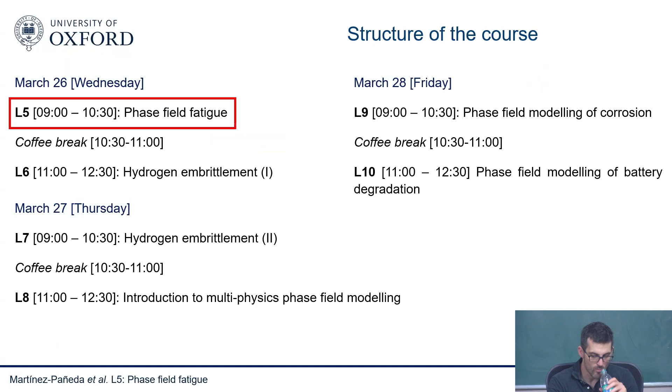A reminder of what we discussed in the very first lecture on Monday: there are basically various regimes in fatigue. The first regime is very microstructural-dominated, where most of the time you spend nucleating a crack—this is the most challenging regime in terms of understanding and prediction. Then there's a regime where you already have a macroscopic crack, and that crack is growing.

It's growing following Paris law. Then you find the final regime where your crack is close enough to the final crack size driven by static fracture, so it grows very fast.

So how do we characterize things in regime B? This is the Paris law—this is what everyone uses. It's still a bit empirical: you have a C and an M parameter that you need to fit to experiments. It would be great to reduce that empiricism, to actually figure out what this C and this M mean from more first principles, more mechanics.

The other regime is regime A, this first stage, where you're nucleating a crack. This is very microstructurally dominated, and normally we evaluate it with S-N curves. We run experiments alternating a uniaxial tension test with cyclic loading until we measure failure of the sample. We get a lot of scattering, but we get these kinds of curves that are used in fatigue design.

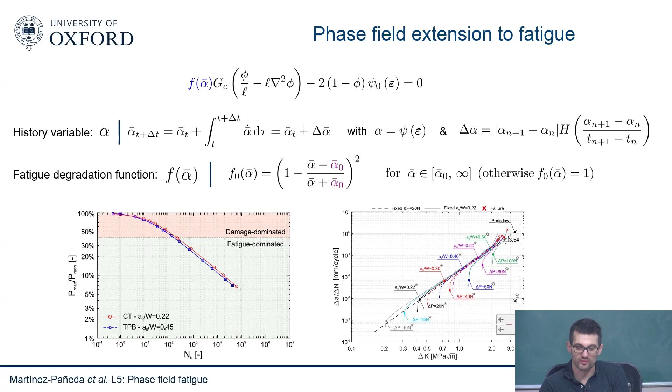So the bad thing about it is we have to make some choices. These choices are qualitatively in the right direction, but we depend on some values that we need to fit to an experiment. But the good thing is, these are results from their paper—when you run these calculations, you predict as an output of the model, not as an input. Before this, there was some work done with cohesive zone elements, but other than that, all the models we had for fatigue would normally require you to do the test, feed the data from that test, and then the model will only reproduce the test, basically. You will not be able to reproduce tests without any experiment.

But here you can see that, without any experiment, you capture both SN curves—this is load versus number of cycles to failure—and Paris law type of behavior. And again, the Paris law comes out of the model. Remember, Paris law has this C and this M—I don't put any C and M in this model, I just run my simulation, the same model that I use for an SN curve. You can see here, this is for a load of 10 newtons. It goes like this, and eventually you fail. So it's not only Paris law, it's the entire regime—you can see that we capture the entire regime with this model.

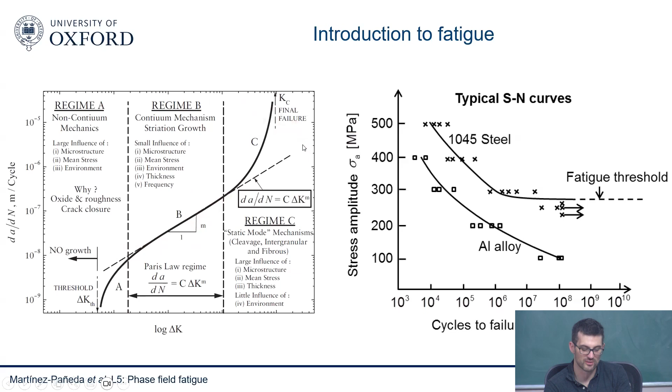So it looks promising. There are some things to polish, but it's quite promising, because a lot of people use Paris law, and you need to do an experiment, but that's okay, we can run an experiment. But Paris law is only appropriate for a certain regime, so there's a danger you're applying Paris law where it wouldn't make sense. This model not only reproduces Paris law, but is also able to capture the whole experiment from the delta K threshold all the way to complete failure. You can see it in all these cases for different load ratios. So it's quite promising—you can get SN curves and Paris law out of the model. It's not an input to the model, it's an output of the model. This is the main difference with other existing models.

We started working on this, and this was work done by my student Alireza Golahmar, who I co-supervised with Christian Niordson in Denmark. Aligesa was funded as an industrial PhD student, funded by a company, Vattenfall, who were looking to extend the lifetime of offshore wind turbines. They operate and manage the oldest offshore wind farm in the world, called Horns Rev 1, in Denmark. These offshore wind farms—I'll talk more about that when we discuss multi-physics problems—are supposed to last only 25 years, and the oldest one in the world, Horns Rev 1, is 24 years old now. So they very soon need to decide whether to extend it or not. Because fatigue is so empirical, that 25-year decision was something a bit crude, so they hoped to improve it with mechanistic predictions, and funded this PhD studentship. He had a very practical mindset and said, I'm interested in publishing papers, but I'm also interested in coming up with something useful.

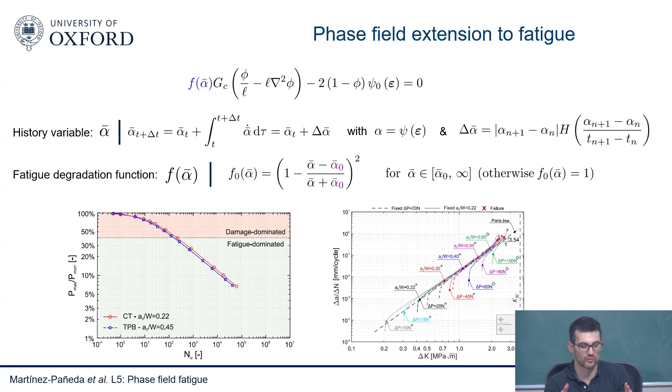So then he realized there were multiple challenges. The first is that this was all very qualitative, but when you try to fit experiments, this model wasn't good enough for him. He needed more flexibility, so he changed his approach. Basically, he changed the way we accumulate this alpha increment, and he came up with this equation. He said, this is what I need to capture experiments. So the idea is you have various ingredients that I'll discuss, but basically you accumulate your cycling variable as a function of these variables.

This is the Heaviside function. There's a term that accounts for the load ratio, an exponent n, and then this alpha 0. So this is the load ratio that you apply, meaning we have an extra parameter. That's the price to pay, you add an extra parameter. But he felt he needed to add that extra parameter, otherwise he wouldn't be able to capture experiments.

So that's an output of the model. We run your numerical experiment, and locally you have an alpha max. But what was important was to define this n term that was not present there. We have the alpha 0, but we didn't have the n. And with the n, he could see that he could capture any slope of the SN curve.

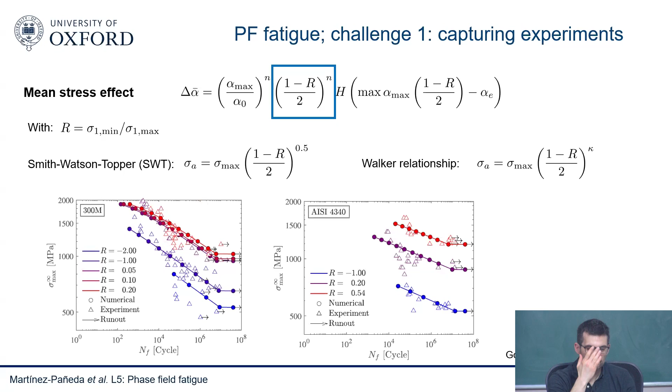Quick question: so the degradation, is it as a function of cycles? Do you upgrade it at the end of the cycle, or is it happening also inside the cycle?

Yes, very good question, we'll discuss this a bit later on. Initially we solve maybe 10 increments per cycle, so you solve the entire cycle. But it's true that you only accumulate damage in the tension part, and this is something we'll discuss in a minute, because different splits depend on which split you accumulate. Griffith's approach will accumulate in both tension and compression, but in reality, we only accumulate in tension. So you have to do some tricks, and at the end you end up accumulating only in the tensile part, which allows you to jump over cycles because you only care about alpha max.

You only care about alpha max. This becomes very important a bit later on, because one of the challenges we have is computational cost, since we're running cycle-by-cycle calculations. So if we don't need to do the full cycle, if we just have the peak cycle, then you can jump over cycles. This is a very good point.

Just to finish, the last ingredient here was the endurance limit. So he wanted to incorporate the endurance limit.

This is widely used by engineers, sometimes when you oversize things to make sure you're below the endurance limit. So you have this Heaviside function, and you have this extra parameter, alpha E, but it comes from experiments. Each material we have tabulated data of alpha E, so it is an extra parameter, but it's again a physical parameter.

We know what is the threshold for. You can see the relationship here, by the way. This is the definition. So I wouldn't say it's an extra parameter in the sense that the endurance limit of a material, we have tabulated data for each material, so we know very well. So this we know before we run the simulations.

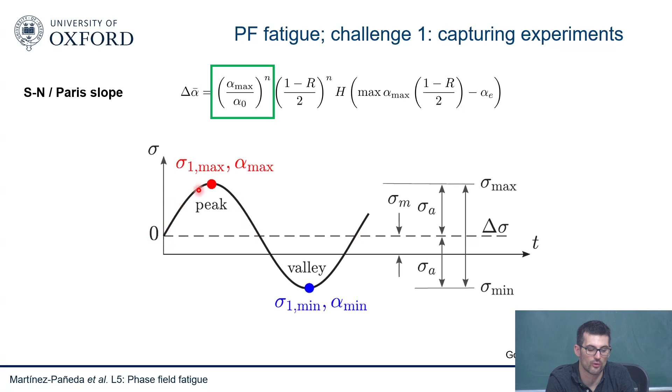So if we go here, this is important because it relates to the question that Anna was asking. We want to accumulate here, we don't want to accumulate here. And the no tension cycle is the only one that accumulates damage only here. And the good thing is that if we know the damage we accumulated here, we also know the damage we accumulate on the way back. So that's the only thing we care about, the alpha max.

So this is the second challenge. You need to pick a strain energy split that accounts properly for this decomposition between compression and tension. And it seems that the no tension split is the only one that can handle that. Otherwise, you're going to get very different responses depending on which strain energy split you use. The other aspect is the calculation time.

Being able to run fatigue calculations cycle by cycle is very powerful from a predictive perspective, because very often we do our experiments assuming a constant stress amplitude, but in reality we don't have a constant stress amplitude. We work with people, for example, in batteries where they charge electric cars, and they do have a history of loading, but every user charges their electric car in a different way, so the battery is exposed to a completely different cycling history.

So that's a problem. Normally in fatigue, the way engineers get around it is by assuming linear elasticity, superposition, and you basically do Miner's rule, so you accumulate damage here and there based on superposition. That's okay, it has worked for many years, and some things are falling down, but not everything. But there are many situations where this doesn't work out very well, if you have an overload, or other phenomena like corrosion fatigue. So being able to actually handle any arbitrary loading history, that's very powerful.

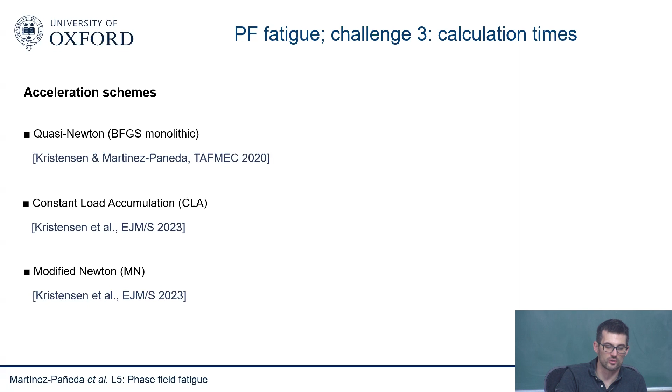Our take on this was using a quasi-Newton approach, this BFGS monolithic scheme, which was discussed the other day. When you compare it particularly to single stagger schemes, these are far more efficient. You can see we get the right result with 4 increments per cycle, versus stagger approaches where even with 500 increments per cycle—this is single pass—you're approaching the good solution, but you're not even there. So that can be a deal breaker.

And every time you see single pass stagger results in fatigue, it's always a bit of you need to take it with a pinch of salt, because it's quite complicated.

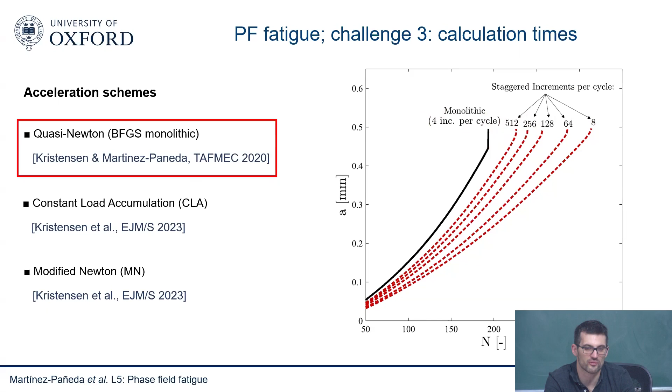The other approach is this constant load accumulation. Since we only care about the tensile part, we may not have to resolve the entire cycle. This relates to the question Anna was asking. We don't have to go tension, compression, tension, compression. You could in principle just move along this line. You just need to know what load you're applying. You can see here the different approaches, and you get exactly the same result basically. So this is the original formulation, and this is the constant load accumulation.

At the end of the day, you accumulate the same alpha with the number of cycles. You just basically need to think of your alpha max.

And then you can combine this with something called cycle jump. This is used quite a lot in finite elements when you do fatigue. If you imagine you're modeling millions of cycles, say 20 million cycles, cycle 1,234 is likely going to be quite similar to 1,235. You're probably going to accumulate the same amount of damage. So maybe you don't need to do every cycle. You can do 1 cycle every 10, 1 cycle every 100, and so on. So that's another idea, this kind of cycle jump.

And you need to be careful, of course, not to jump too fast. There are now some people coming out with error schemes that will tell you how far you're deviating.

And then the other approach we took was this kind of modified Newton, where if the cycles are not changing too much, maybe you're not really changing things too much. Maybe you don't need to build the stiffness matrix every time. Maybe you could just solve with your original stiffness matrix and rebuild it every X number of cycles.

But I guess what I want to say at this time is that with the combination of 2 or 3 of these acceleration schemes, we are getting to calculation times that become sensible.

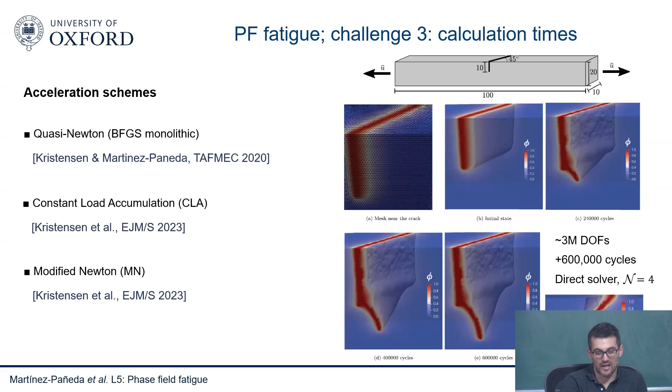If we can reduce the convergence criteria—maybe, we haven't done that because you never know. When you start playing with convergence criteria, sometimes it's good, sometimes it's bad, sometimes you deviate from the real solution, and then you struggle to recover it, and it's worse for convergence. I guess one can play with those things, but I don't expect big gains on that front.

I think what was interesting about these models is that it's a paper we have almost done—we haven't submitted it yet—but we were quite excited to show that we can predict the relationship for linear elastic materials. For plastic materials, there's other things happening, but for linear elastic materials, we can go from SN curves to Paris law. This is something that hasn't been done before. These two stages of fatigue are treated independently: one is Paris law, the other is the SN curve.

You could think both must be connected because both tell you how a material degrades under cyclic loading, but they hadn't been connected before. We can see that this is the case with our model. We run simulations for different values of this n coefficient, and we get different slopes when we run the Paris law.

So somehow there's a relationship between the slope of the SN curve and the slope of the Paris law, and we can show this is not only qualitative but also quantitative. We've shown theoretically, through some calculations and integrations, that by considering a damage mechanics approach, you can determine that the C value and the M value of the Paris law are related to the SN curve. The M is related to the inverse of the slope of the SN curve, and the C is related to the fracture resistance that depends on the fracture toughness and the M.

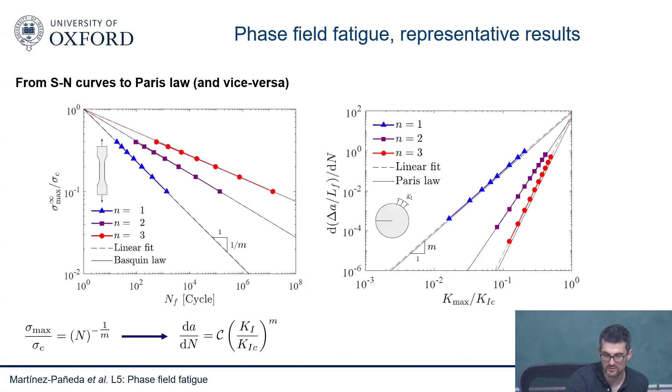Yes, so the model has an R ratio component. This R ratio component becomes more significant in the case of an SN curve, while it becomes less significant in the case of the Paris law, because it's more toughness dominated versus strength dominated failure.

So it seems, we don't have extensive validation, so it's very difficult to find data in the literature for this, it has to be linear elastic materials. So linear elastic materials, like PMMA, where they do SN curves at different R ratios and Paris law at different R ratios and so on. But so far it seems to be working okay.

Again, for linear elastic materials - in elastoplastic, high regions of the SN curve, you have a change in behavior and there's other things happening, so again, very much ongoing work. We haven't even submitted this paper yet, but I think it's exciting in the sense that we finally understand a little bit of what's underlying this Paris law, which was very empirically driven, and this SN curve behavior, this Basquin's law, which is also very empirically driven. The idea that you can go from one test and predict the other, that's I think also quite powerful. So I'm excited about this, it's still ongoing work, there's things to polish, but I'm excited in the direction it's going.

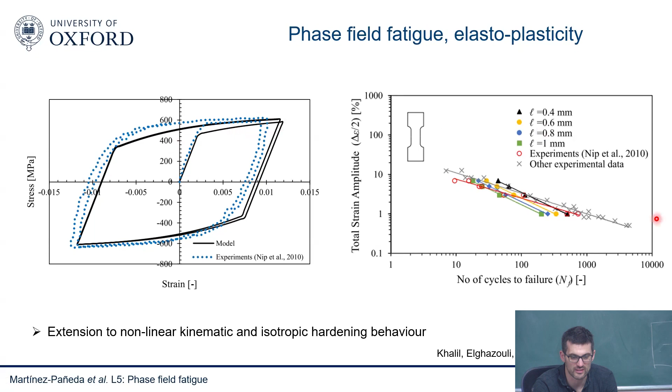So what we did here was to extend the constitutive model to account for nonlinear kinematic and isotropic hardening behavior. You can see that it reproduces the cyclic response that you expect from metals—this is for some steels. And you can see that the model seems to agree with what we see in terms of the SN curves, in this case, total strain amplitude, low cycle fatigue.

Here again, you're seeing this. Basically, I guess the takeaway is that you can combine these phase field models with any choice of constitutive model that you feel you can incorporate here. Of course, the more things you add into the model, the more you need to think about things and the more choices you have to make.

So for example, here we have this alpha that you accumulate—you accumulate the elastic strain energy density, or the elastic plus plastic. We normally take this approach where we assume that only a percentage of the plastic work is stored. But when you're talking about fatigue, a lot of the community that do crystal plasticity and so on typically consider only the stored plastic energy, because they say it dominates completely the behavior ahead of a crack. So the picture becomes much more complicated, and there's some choices one has to make.

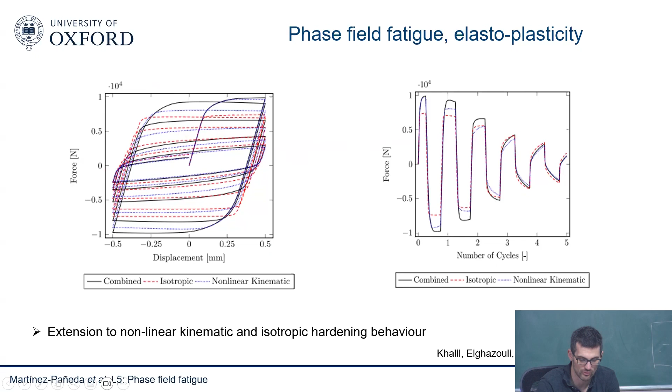Again, very much an ongoing discussion—there's nothing consensual yet, but I just wanted to show you that you can calculate this isotropic nonlinear kinematic behavior and incorporate those things. And you can do that not only in small scale samples, but also large scale samples. You see a pipeline here where we did this sort of fatigue analysis, and you can see the propagation of cracks and so on.

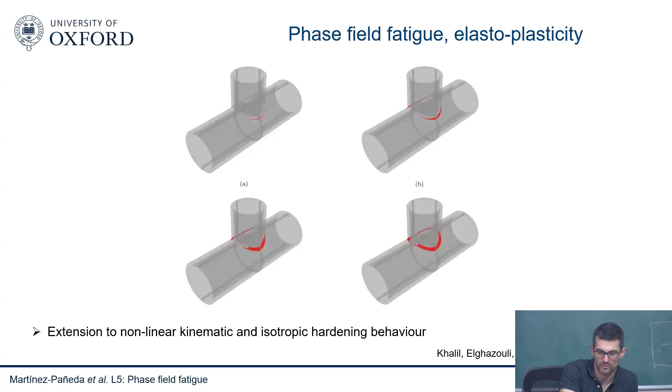Okay, the last item that I want to cover until the break is related to fatigue and the impact of surface roughness. We were just talking yesterday, visiting some of the labs here and talking with one of the academics here, explaining how much they're interested in the impact of surface roughness on fatigue life. This is a well-known effect—we know that surface roughness has a significant impact on fatigue life.

So people are quite worried about that. Normally there's a number of reasons why you may get a rough surface. One of them is your manufacturing method, and this has become a very hot topic due to additive manufacturing. But the other one is corrosion and problems like this. If you have some sort of aggressive environment, you get a rough surface, and then you get a degradation in your fatigue life, and you're not sure whether the degradation is due to the effect of the rough surface, or the combination of corrosion and fatigue, and so on and so forth.

So there's significant interest in trying to quantify this effect of the roughness of the surface, particularly these days mostly due to additive manufacturing. We know that we get a rougher surface in additive manufacturing, we know this is going to damage our fatigue life—how much is it going to damage our fatigue life? How much do I need to improve? What kind of treatments do I need to do?

And this is something that is well known. For many, many years people have been working on this—I'll talk about work that my postdoc Sara Jimenez Alfaro has done; the paper is currently under review. But basically, what people do in the community—the fact that your fatigue life degrades significantly with roughness is something that people have known since the 70s or so, quite a long time ago. And people came up with what they call a surface factor, this KS, surface factor.

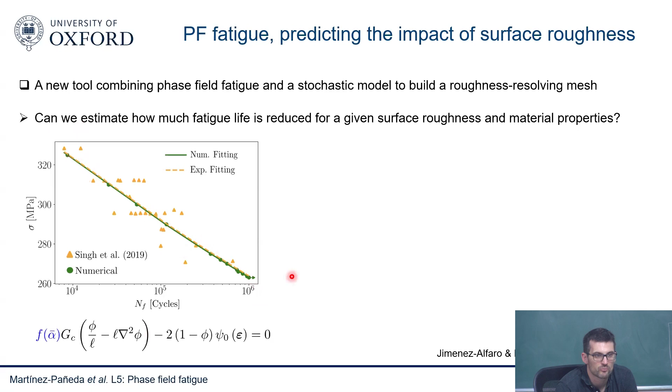Now the question is, what do you do with the roughness? You need some sort of statistical model, a new finite element tool that allows you to capture this. People normally quantify roughness using a couple of parameters, typically two: this RQ, which can be related to another one called RA, and this correlation length. These are the two parameters.

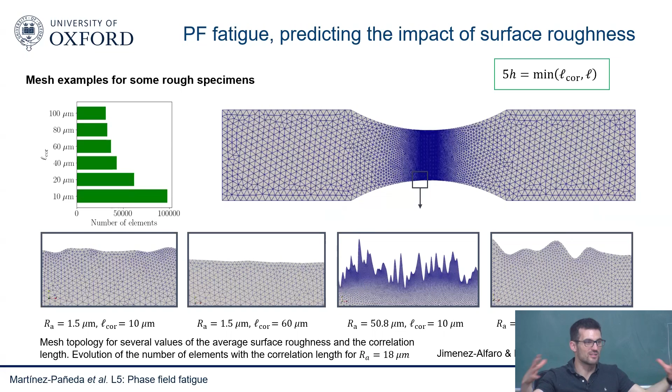But every time you generate a mesh like this, there's going to be some sort of stochastic noise. So every mesh you generate is going to be slightly different. You need to run enough calculations to get a statistically representative result, and then you get a bit of scatter. Once you do that, you can compare with experiments.

So let me see, yeah, you can compare with experiments. I forgot to include an image, but you can see that when you run more than 30 calculations, more or less, you start seeing your margin of error decrease. You start seeing how the number of surfaces tested for those two variables starts being enough. But basically, this is what you get.

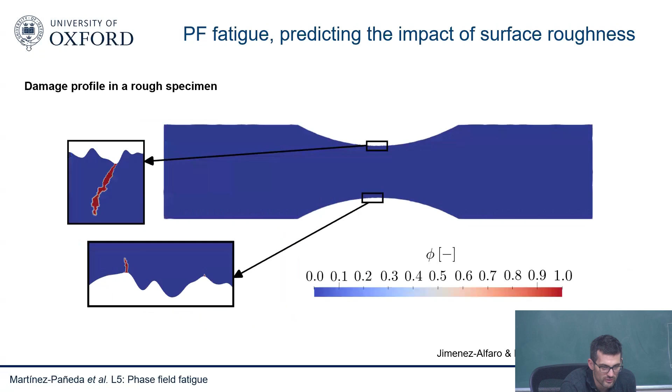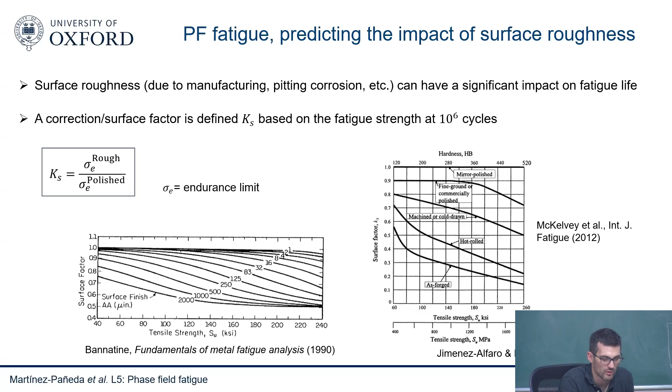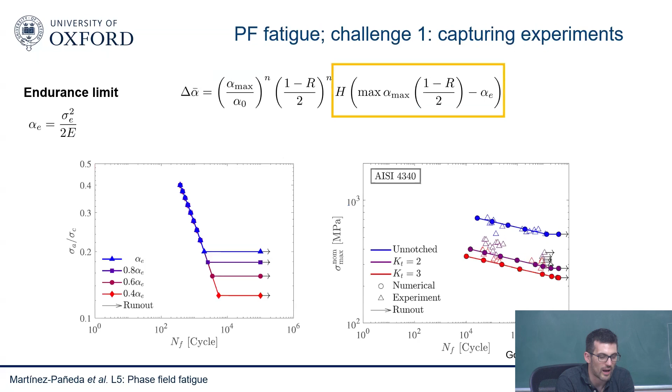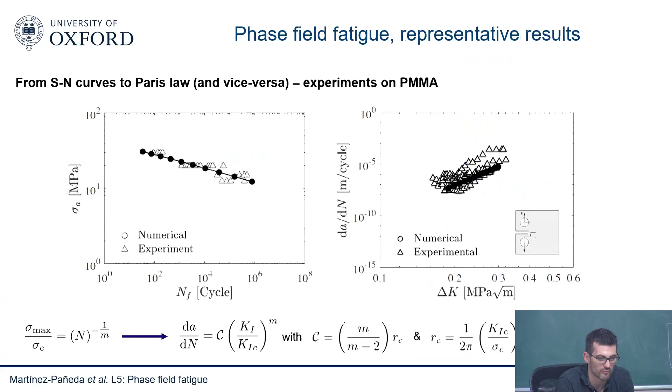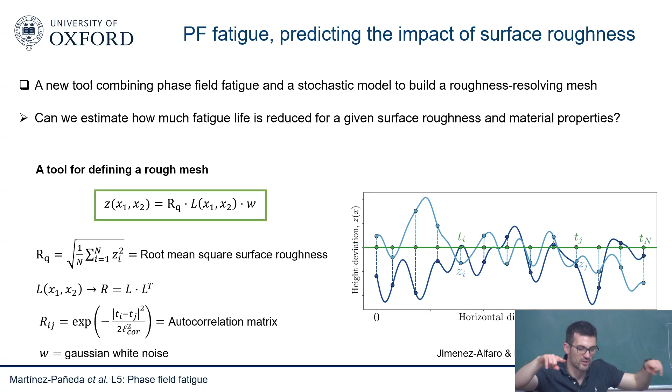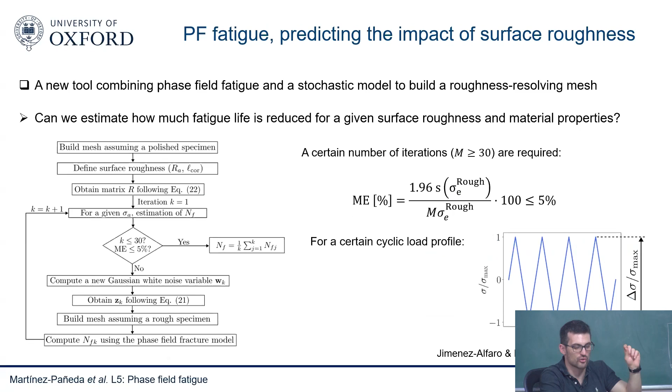The way we capture this is by running a statistical analysis, using a technique from the optics community, where we generate surface roughness as a function of two parameters. There's some white noise in there, so we need to run a statistical analysis because the predictions of phase field, while deterministic in a way, might depend on your surface roughness even for the two parameters you've chosen. So we run enough calculations, calculate the margin of error, make sure it's within a certain percentage, and then determine the fatigue life for each calculation.

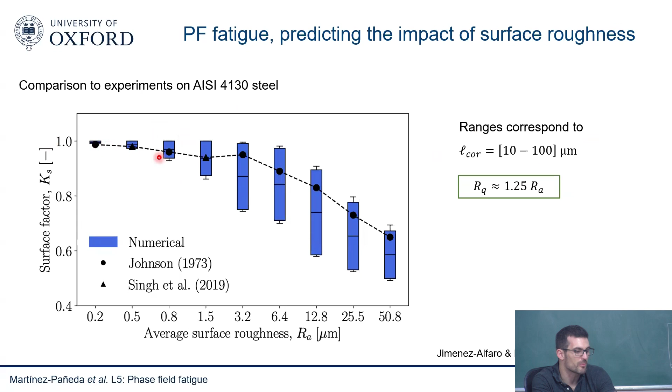As you can see, the prediction matches experiments fairly well, even though there's a bit of scatter because of running multiple simulations, and because we didn't know the correlation length from the experiments. We seem to capture the data quite well. Importantly, we can build these maps to tell us what degradation in fatigue life we're going to get.

This is quite important because, as you can imagine, for example, in offshore wind turbines, the project that Sarah is funded for is based on offshore wind turbines, so they have a lot of pitting corrosion, and they want to figure out from that pitting corrosion what will be the impact on their fatigue lives. So you can run the simulations and predict what will be the impact on the fatigue life.

Okay, I think that's all for phase field fatigue.

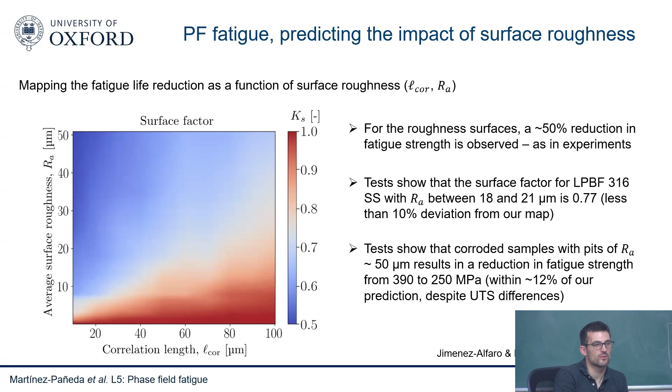Let me go back here. I mean, it's a choice, maybe just here. So it's a choice. We have a driving force, and you have a fracture resistance, toughness, and accumulation of your driving force for fracture, stored energy.

Some people have argued in the phase field fatigue community, it's a little bit the same for the phase field ductile fracture community. There's been two approaches. Some people say, I want to enhance my driving force, I want to maybe increase this with the number of cycles, or I'm going to degrade my fracture resistance.

I tend to like, and I did the same for hydrogen, to degrade my fracture resistance because I see it as more physical, maybe it's a bit philosophical, but more physical in the sense that this is what I think is happening in reality. Hydrogen is degrading my bonding strength; fatigue, this kind of accumulation of cycles, is degrading a little bit my resistance to fracture. But I guess you could think of it as well as a driving force. You could say, I have a static driving force, and now I have something that is enhancing my driving force, or something along those lines.

It's a little bit inconsistent if you just take phase field fracture for brittle materials. Even there, you're still saying once a crack is propagating, your fracture toughness of the material is actually degrading. So you could actually have the 1 minus phi. But you don't degrade your fracture toughness, right? Your fracture toughness is a constant.

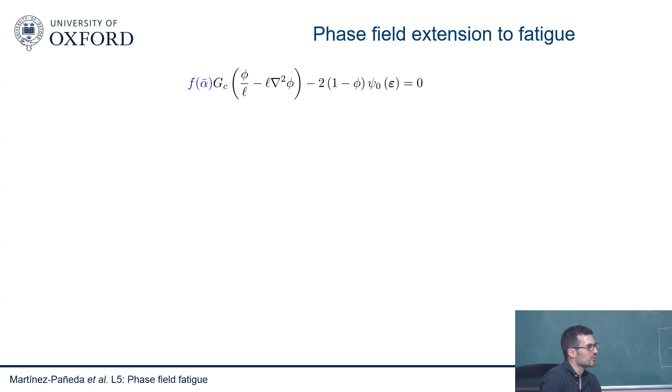Yeah, I still kind of prefer my approach, but it can be a bit of a personal viewpoint thing. I still prefer to think that my accumulation of cycles is degrading my fracture energy, but I saw a very good talk by Roberto Alessi at Complas some years ago where he made an argument for both cases, and it sounded convincing, I guess. You could always do it in both ways.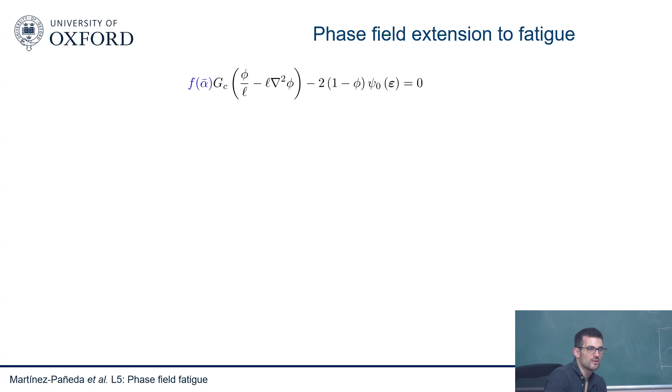So is it okay to then think that the fracture toughness of the material is actually degrading because of fatigue? I think so, and I think that's consistent with what you think of these KT diagrams that the fatigue community uses quite a lot.

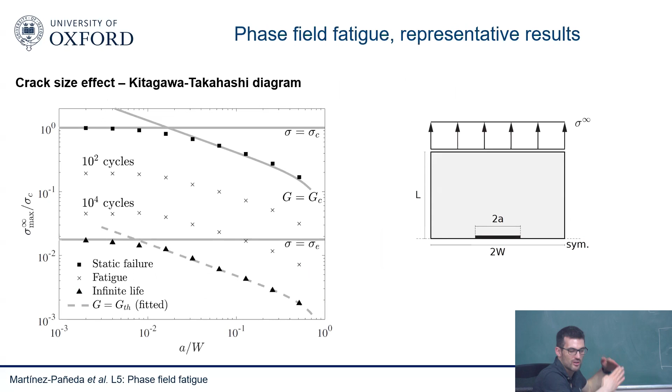So these KT diagrams will tell you the transition flaw size as a function of number of cycles, and the transition flaw size is basically how it changes between the failure stress versus crack size as a function of strength, which is not going to change that much. Oh, it's going to change with fatigue, of course, but also about fracture energy. And I think it makes sense that we know the transition flaw size goes in this direction, so this is the static case, we know it goes in this direction—the experiments show it all the time.

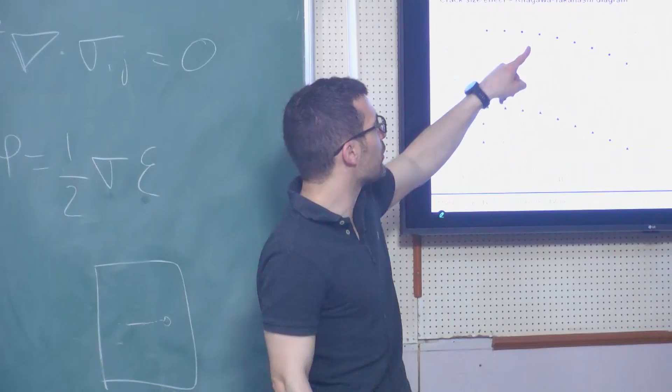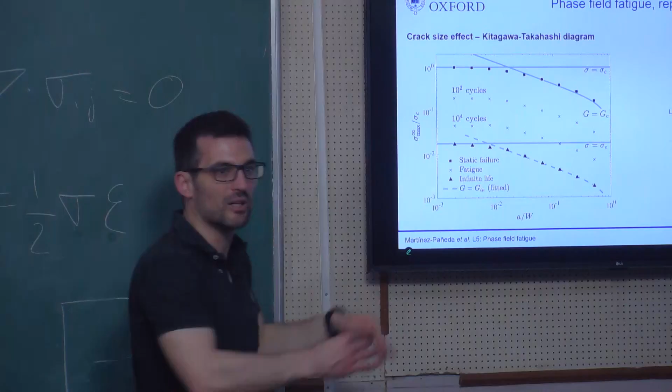And for it to go in this direction, I guess, this could remain the same and this could just go down, but then it will go somehow in this direction, right? So in order to go in this direction, both curves need to go down. So I think, to me, it's the most sensible approach. It's a bit philosophical, and probably you can get the same kind of qualitative results whether you pick one or the other, and this seems to be what we see in the community.

But I do like the idea, and I don't know if you'll be able to recover this type of behavior, for example, with the driving force. Maybe you do, I don't know, I haven't run that calculation. What about the length scale parameter? Like GC is degrading, so maybe that L is also a material property that...

Yes, so if you remember the equation for the relationship between the strength and sigma—the strength—it was something along those lines. So you have E, you have GC here, and then you have L, and then some sort of factor, whatever constant there. So it is true that by degrading the toughness, you are already degrading the strength. That's why you see this drop in the KT diagram. That being said, is this the way the strength should be degraded?

It's a little bit similar to the hydrogen problem—it's the same thing. We degrade this, and automatically it's degrading the strength. And we see in experiments this type of thing. So the qualitative trend is the same. But is this the right relationship? Should we do something else here? Should we change also a little bit the length scale so that the factor is the right one?

Difficult to tell, but it's a good question. So far we're assuming this will get us far. It seems we can capture SN curves, which are strength dominated, and Paris law with the same scheme. So things seem to be going in the right direction, but it is an open question. I guess one could refine the details further.